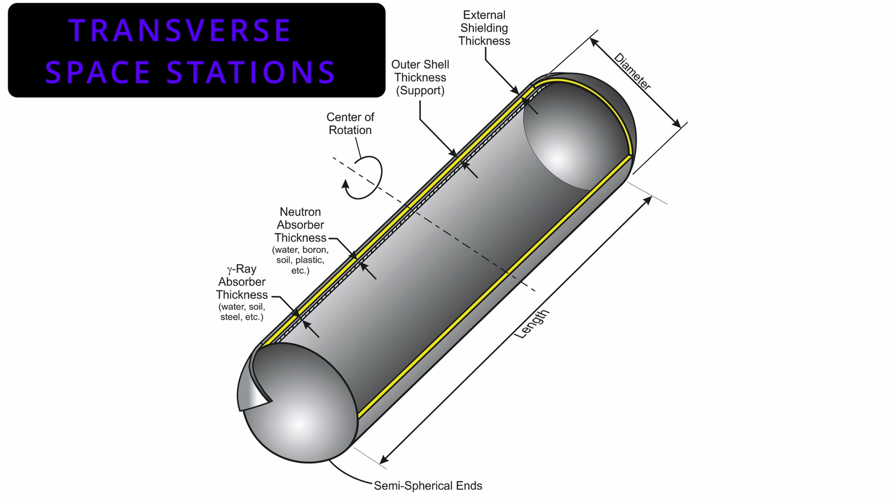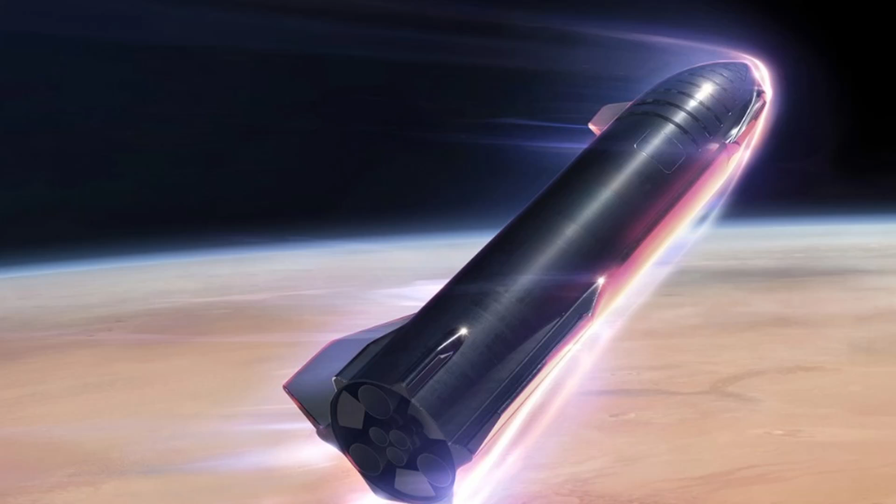Now, in the last episode I was also going to talk about transverse space stations, but kind of ran out of time. And now I'm looking to extend that episode into the future a little bit because I want to put it just before my discussion of the Starship that SpaceX is making at the moment and how I'm going to be able to turn that into a transverse rotating space station very effectively and at probably very low cost and weight. And so we'll be looking at that several episodes from now. But for right now, we're going to be looking at the RAGNER cylinder and hopefully considering the costs and benefits of that design, and it's going to be surprising, some of the things you're going to see.

Before I discuss the RAGNER cylinder, I want to take a look at some other spacecraft and space stations for comparison purposes. And these are going to be the Starship Enterprise, the Babylon 5 space station, and we're going to review the O'Neill cylinder and some of the factors involved in that particular space station. Now, for the Starship Enterprise, if we look at the data for it, it's supposed to weigh 190,000 tons, which equates to about 442 tons per person. This is relatively reasonable and makes it a spacecraft that could actually exist. It's supposed to have a crew of 430, and that's how we get that number of 442 tons per person.

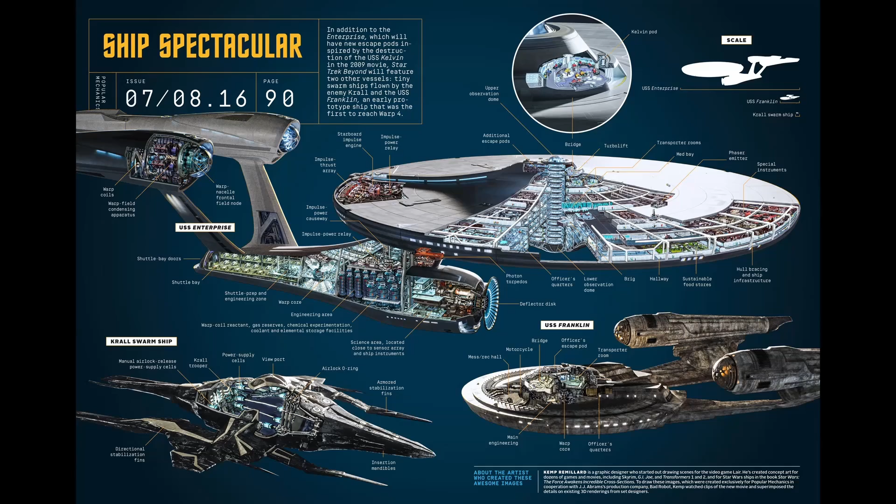It had a length of almost 1,000 feet, a width of 417 feet, and a height of 238 feet, and sported a crew of 430 people. Now, that equated to approximately 216 square meters per person. We could make it smaller, but I think that's a reasonable number. So the Starship Enterprise actually has some statistics that are reasonable as far as weight and size and space for the people working there. And if you watch the episodes, you can tell that the hallways are normally fairly empty, and that would make sense if everyone has over 2,000 square feet of space to live in. You're not going to see people all the time. You're going to be in different rooms and things like that.

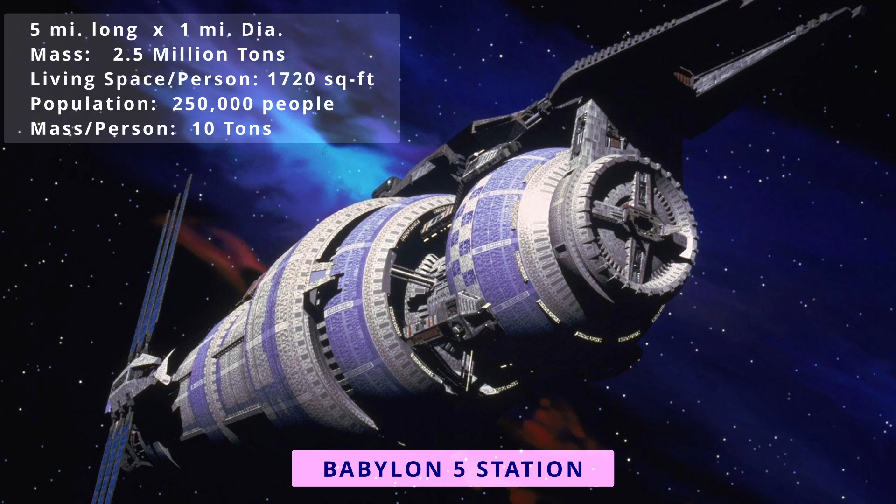Now let's look at the Babylon 5 station, which is considerably larger than the Starship Enterprise and is quoted as being 5 miles long and appears to be about a mile in diameter, and is composed of sort of an O'Neill cylinder with a Bernal sphere on the end. And we're going to approximate that by just making it a complete O'Neill cylinder, which is a very good approximation of that space station. The Babylon 5 space station is quoted as having 250,000 people living on it and weighing 2.5 million tons, which works out to about 10 tons per person.

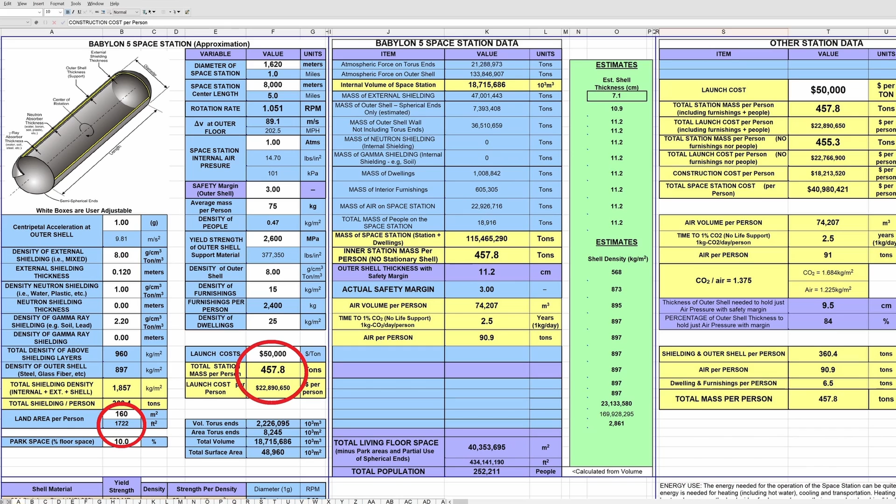Now, on first calculation, 10 tons per person is not even reasonable because the Babylon 5 station is so large that just the atmosphere inside the station with 250,000 people represents 90 tons per person just for the air inside of it, not counting the space station at all. So obviously it's much greater than that, and when I calculated it, I came up with a little over 400 tons per person for that particular space station. Now, this did give the people around 1,720 square feet of living space per person, which is a reasonable amount of living space.

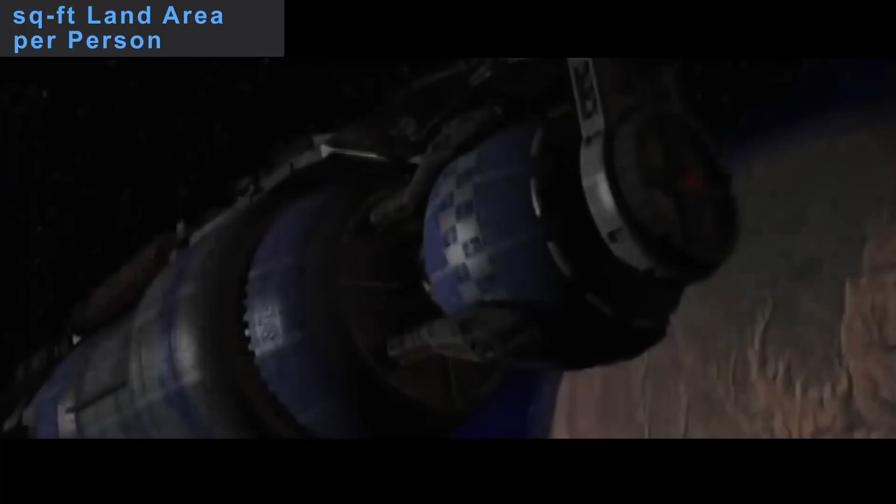But when you look at the videos, you see that Babylon 5 always appears to be very crowded, even though everyone has about 1,700 square feet of living space or floor space, and not counting having multi-story buildings. So it could be relatively empty except for high traffic areas such as malls and things like that.

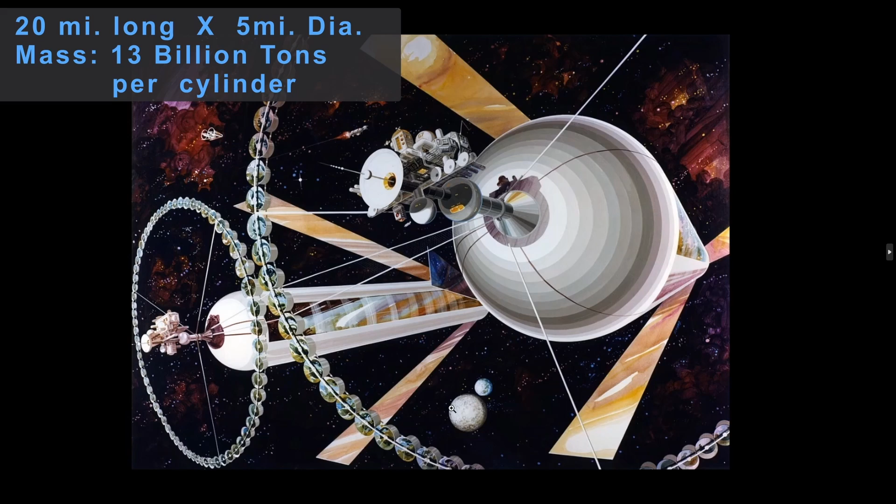The O'Neill cylinder is even larger at 20 miles long and 5 miles in diameter, and having an estimated mass of 13 billion tons. Now this works out to about 2,000 tons per person, and that's assuming the entire interior is used for living space. For the original O'Neill cylinders, he had 2 cylinders counter-rotating to balance the rotational inertia of the system, and half the surface area was windows to allow sunlight in and radiant heat to exit.

Now, both of these stations would require a lot of mass per person, and the original O'Neill cylinder estimated about 6,000 square feet per person, so that about 4,000 or 5,000 square feet could be used for growing food. And this is a reasonable thing to do, to grow your food on the station. But this bumps the cost up well over $1 billion per person. And this is not something that we can afford at this time.

Maybe when we each have 10,000 robots working for us, we have a $1 billion income that we can afford to have a luxury condo in space. But until then, we have to reduce that cost. And so now we're going to look at the RAGNER cylinder, which is an attempt to greatly reduce the cost of actually having a home up in space.

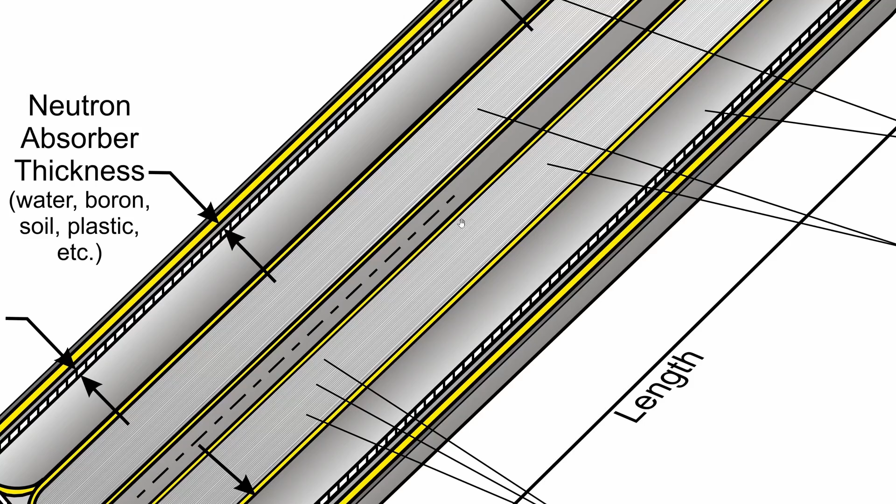And essentially these tori have the shape of a pipe, where the walls of the pipe are hollow. And inside these walls, each torus has multiple floor decks, and you see many of them right here. And those are supporting people and have condos or shops or things like that. And we're going to discuss those in just a little bit. The outer torus here does not have any floors in it yet. They haven't been built, and they would also contain living space.

And so the RAGNER cylinder is basically very different from the O'Neill cylinder in that it populates the entire volume of the space station, while the O'Neill cylinder only populates the outer edge or surface of the cylinder. And so we can get many more people in a RAGNER cylinder than we can into an O'Neill cylinder.

The outer shell on a RAGNER cylinder is the strongest portion of the cylinder. And that is because it not only has to support all the air pressure that's inside, but it has to support the mass of people, the internal radiation shielding, and the external radiation shielding and debris shielding. And so all that mass, as it's rotating, has to be supported by this outer shell. And so that outer shell is going to be generally about 1 meter thick or more, and provides a good radiation shielding itself, and also the structure to hold the cylinder or torus in its shape.

Now the inner rings or tori can have thinner shells because, one, they're supported by air pressure on both sides, and because the gravity is reducing as you go in towards the center of the RAGNER cylinder. And this provides very low weight but safety for the people, because if one cylinder or one torus loses pressure, the people in that torus can move to one of the other ones that has not lost pressure for safety. And hopefully you can repair a torus that's been punctured before you lose all the atmosphere, because we're talking about a lot of atmosphere if you lose it. So a lot of safety systems should be employed to keep the atmosphere from being lost.

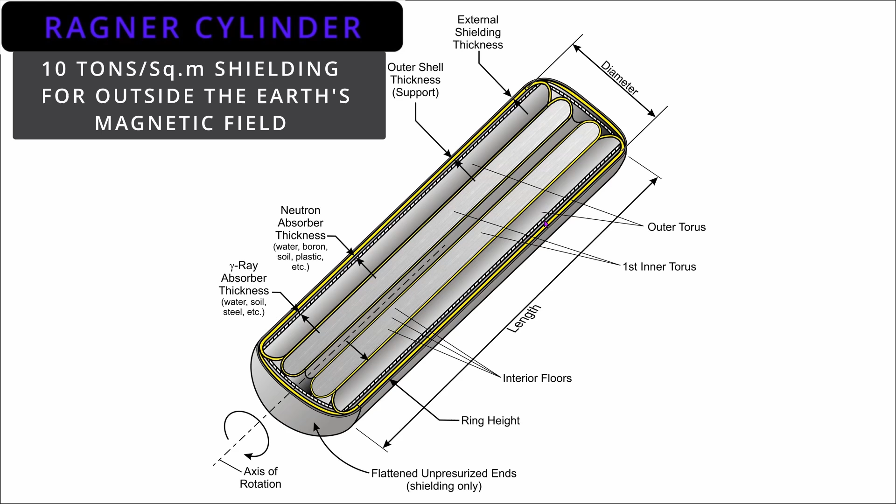I'm not going to talk too much about the radiation shielding here for the RAGNER cylinder, because it is essentially the same as for the O'Neill cylinder or any other space body, and the 10-ton rule is a good rule to follow. That is, 10 tons of radiation shielding per square meter provides very good shielding independent of what material you use. And you can see this in the fact that we have approximately 10 tons of air above us to protect us from cosmic radiation.

And a nuclear reactor uses about 4 meters of concrete, or about 10 tons per square meter, to protect people from radiation coming out of the reactor core. So this 10 tons per square meter is a good rule. Of course, every material has a little bit different interaction with radiation, and some materials are better than others.

Liquid hydrogen being probably about 50% better than most materials, but hydrogen has the problem of being a liquid and can leak from containers very quickly, and needs to be contained at a cryogenic temperature, which is also very difficult because of the very low temperature of liquid hydrogen, and so really is sort of impractical for a space station.

And so generally we'll use something like water or polyethylene that has a lot of hydrogen in it to provide the radiation protection we're looking for. And so generally we are going to provide the radiation protection with materials like that and not liquid hydrogen.

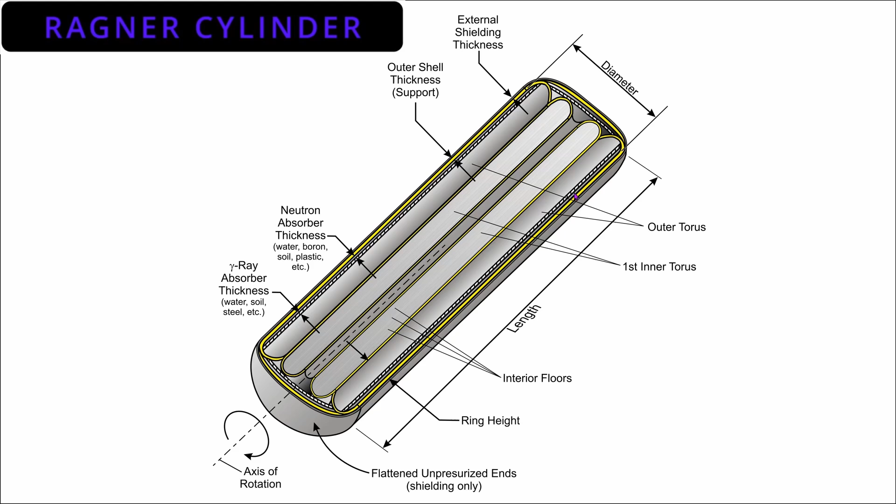The exterior shielding is used to protect the space station from debris and impacts from outside. And this is very, very important, and it needs to be able to stop different sized projectiles that are coming in at hypervelocity and prevent it from puncturing the outer shell and causing a depressurization of the space station. And to do that, I have come up with this structure, which is very similar to what NASA uses.

You have a very thin outer layer that is designed to basically explode smaller projectiles or debris up to about 1 centimeter in diameter. And those pieces of debris, as they hit this 1 millimeter thick layer, essentially explode into vapor. And as a rule of thumb, about 300 times spacing between that layer and the next layer that has to absorb that explosion is a good rule of thumb. So if you multiply 1 millimeter times 300, you get 30 centimeters. And so about a foot distance between this 1 millimeter layer and the next one that has to survive that explosion.

And if we make this layer 1 centimeter thick, or 10 times thicker, it's going to require about 3 meters of space between it and the next layer, so that the explosion from, say, a 10 centimeter diameter piece of debris has room to explode and expand before it hits this next layer. Now, this 10 centimeter layer, again 10 times thicker, is designed to be able to obliterate things up to 1 meter in diameter. And of course, we're going to need even more space for that explosion, because that's going to be a serious explosion, something 1 meter in diameter. And I've marked it here for 30 meters, which is reasonable.

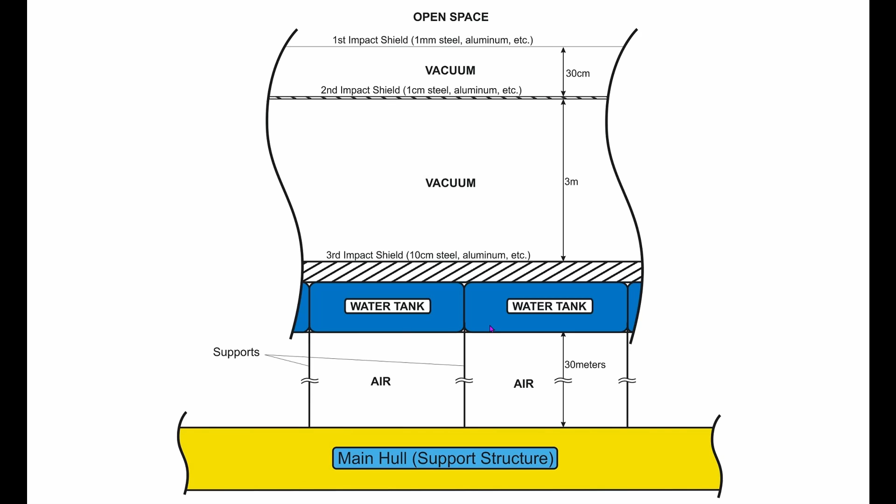So something like this could be used, this space, but the gravity here, because it's 30 meters, you're talking about a little bit added gravity due to the rotation of the spacecraft and the slightly larger diameter of this surface compared to the actual main hull of the space station.

Looking at a RAGNER cylinder, and this is what I'm calling a RAGNER cylinder, it's 10 kilometers in diameter and 60 kilometers long. So not a small thing, 6 miles by about 37 miles. So like a small town. And notice on this particular spreadsheet, I've increased the accuracy of the RPM, because what I'm going to do up here is I'm going to see how much greater the acceleration is going to be if I add 30 meters of radius to the space station.

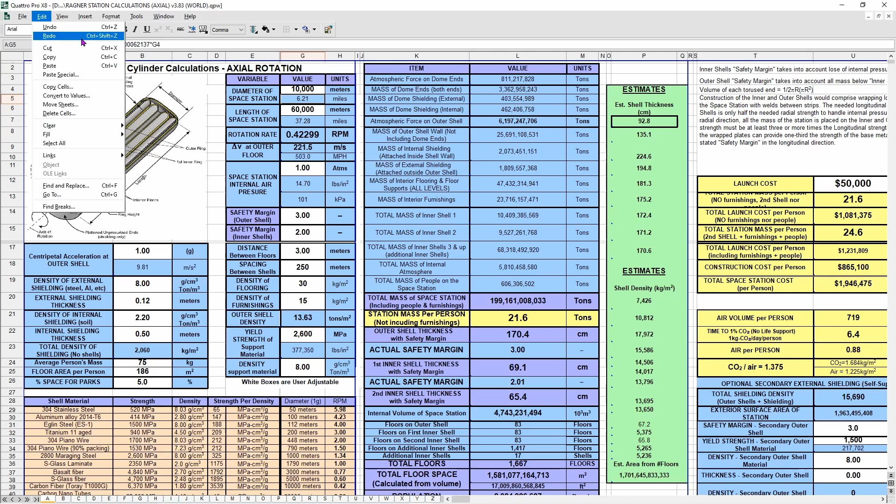So by adding 30 meters of radius, we are adding about 6 thousandths or 0.6% to the acceleration, going from 9.81 to 9.87 meters per second squared. So not significant. It's not enough that anyone would probably even notice that there's a difference.

However, if we change this diameter, our RPM changes to 0.94584, and at 1G, that is a little over a mile in diameter. So we add the 30 meters of radius, we see the rotation speed has changed, and I'm going to guess a 2% increase in gravitational acceleration. And we're almost there, but not quite. Let's go to 3%. Try that. And there is the exact same number.

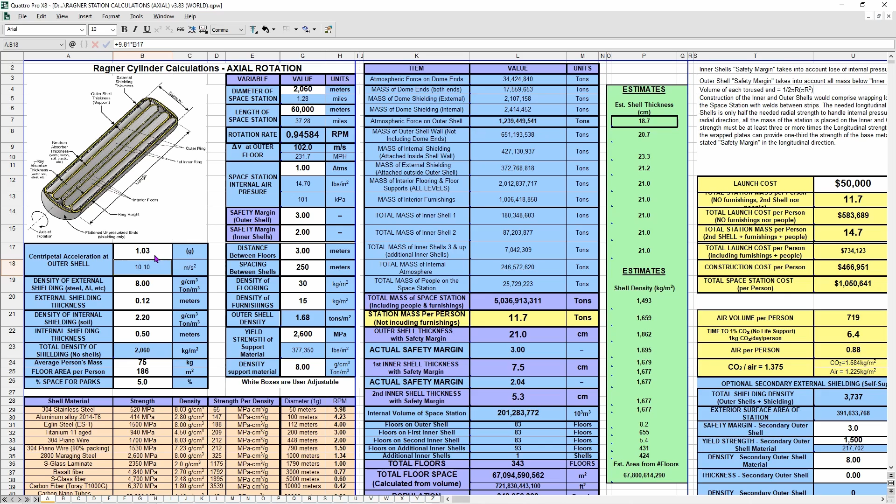So almost the same weight that you add when you put on heavy clothing like jeans and a sweatshirt and shoes. You're adding almost the same amount that you would add to your mass by going out to this outer rim. And so that's not going to affect anyone very much and not going to be a problem. And so perfectly workable that people could work in that environment for short periods of time with the radiation.

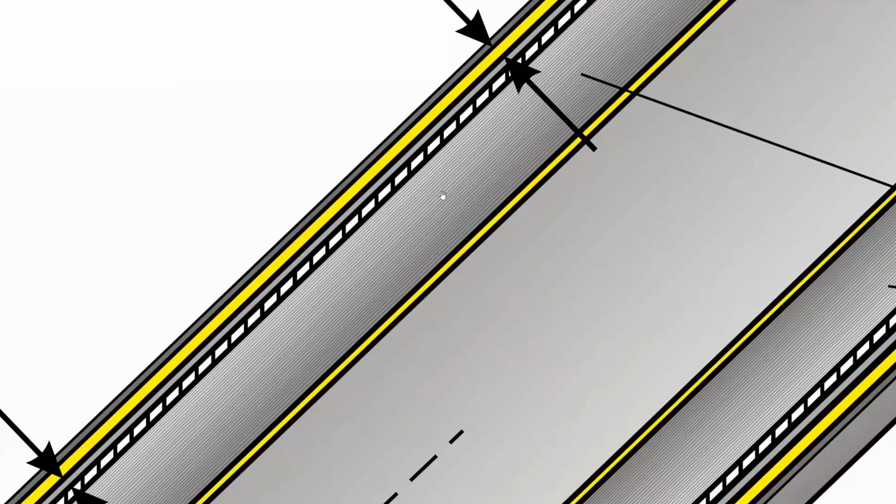Now here we see just the outer ring, or what I'm calling an outer torus. Structurally it's a torus shape, an elongated torus, hollow in the middle. And this structure has multiple floors in it. And these floors are going to be hung from the inner surface. And what that does is actually provide the mass to kind of hold this in place against air pressure.

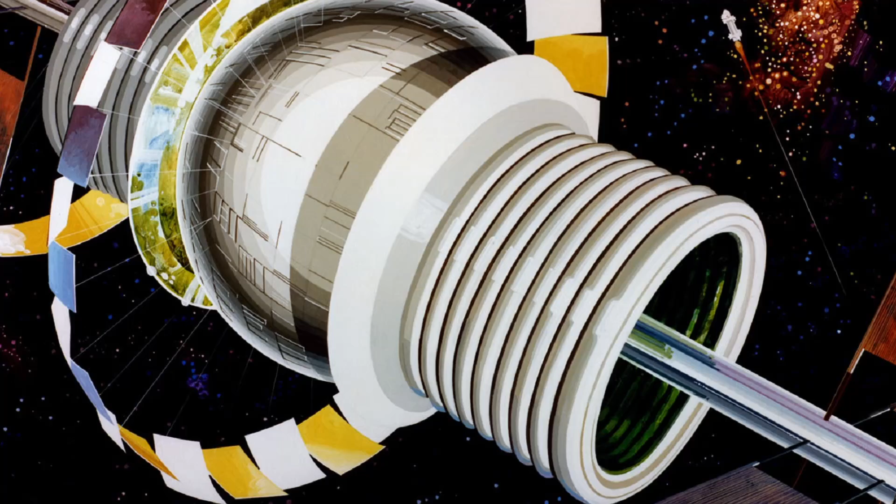For example, if we lost air pressure in here, this inner part of the torus would want to collapse down if nothing else were holding it up, because it's no longer a circular shape to support itself. It's just basically a flat cylinder that would want to crush under air pressure or expand out towards the center under air pressure. Now the outside here is a cylinder, so that's not going to want to expand, but this coming out this way is a problem.

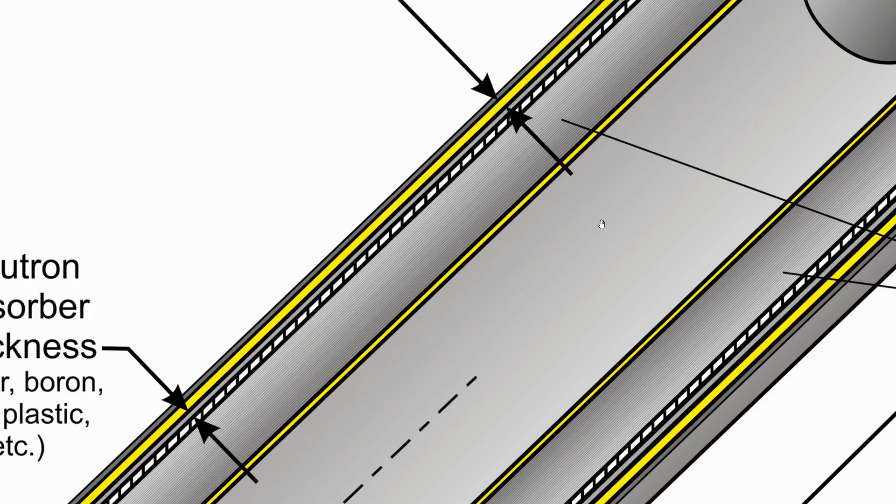And so what we have to do to prevent that expansion, should we lose air pressure on one side, is to actually put some supports in here. And you have supports going from the outer to the inner part of the torus. Essentially, these floors are being hung from this inner layer going down, and that's a much more efficient means of supporting a structure than trying to build it from the ground up.

Everyone knows that it takes more structural material to hold something up than it does to hang it from a ceiling. And so that's the reason the RAGNER cylinder is built this way, that all the flooring is built down from the top, not up from the bottom.

And this structure here can be as simple as walls that are extended within the torus, and essentially each one of these would be a ring of material that goes around the torus supporting it, and would have a certain spacing so that this inner wall could not collapse inward. Even if this became a vacuum in here, the air pressure and the mass of all this structure would be enough to hold this inner ring in place and not be damaged because of loss of pressure in another torus.

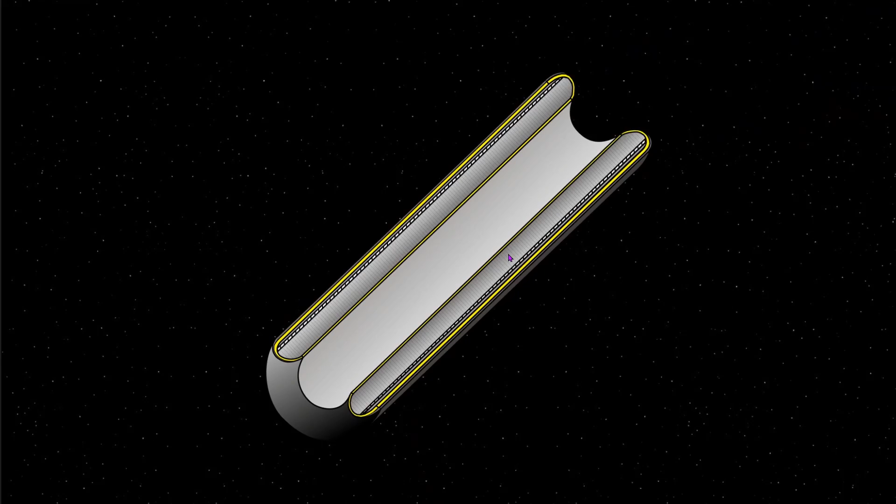And so that provides us a lot of extra safety in that each torus, the outer or even the inner torus, is self-supporting and can contain its pressure and still have vacuum on the inside and on the outside and still be supported.

And again, this scaffolding or this structure between the inside and outside of the torus can have very many different structures. These could be cylindrical tubes that go from the inside to the outside and provide the structure that way, or they might be walls, they might be strips of stainless steel hanging down that all the buildings and flooring is attached to.

Many different ways of constructing this interior so that it is hanging down in this direction from the top, but still connected so that the outer shell here and the inner ring are connected so that if air pressure is lost in here, this ring cannot expand inward. It is held in place by all this structure that is supporting all the flooring in the RAGNER cylinder.

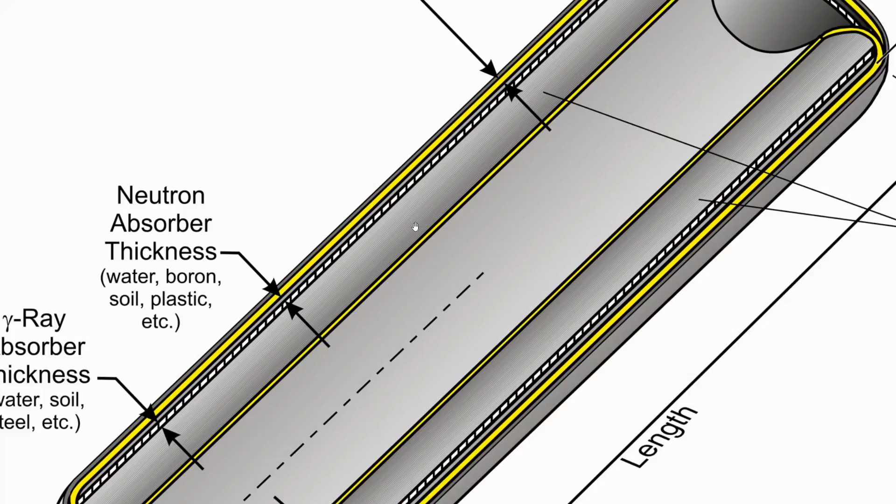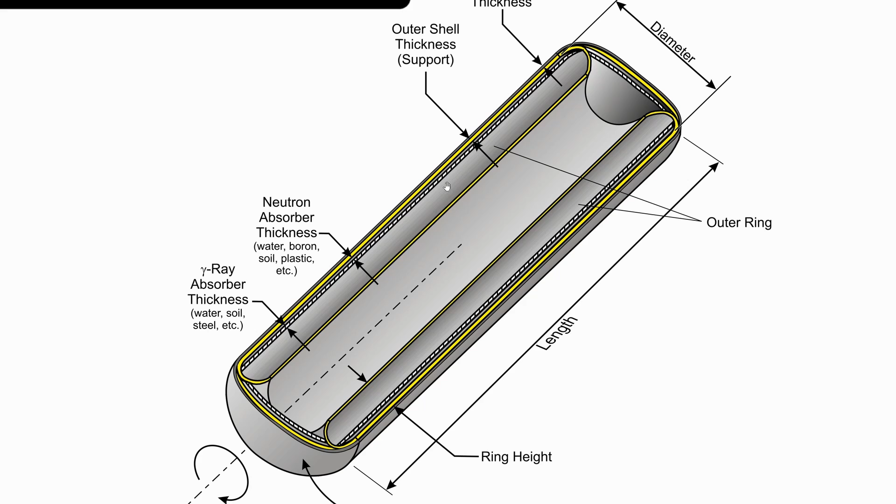One more thing before we go on to looking at the spreadsheet is that the floor spacing inside these tori can be adjusted in the spreadsheet, as well as the distance between the top and bottom of the torus. And that allows us to adjust the floor spacing and also spacing of the tori. And this gives us a little bit more control to find out, as more tori increase the mass significantly for the space station, what is the optimal spacing between the inner and outer surface of the tori. And so we're now going to go look at the spreadsheet and calculate some of these factors.

I'm putting a safety margin of 3 for the outer shell, which is the portion of the space station that holds everything together, and a safety margin of 2 for the inner shells, which make up the inner tori. And this margin is not its normal operating margin, but during emergencies, when one of the tori next to it has lost air pressure and the stresses on it suddenly go up, this is the safety margin for that condition, not for the normal operating condition.